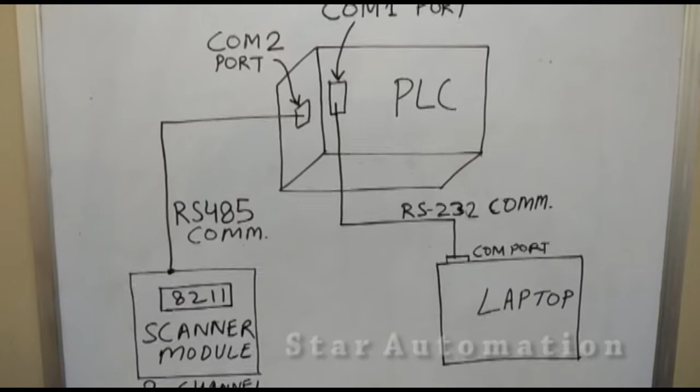So what we will be doing today is communicate the PLC with the scanner module, which has an RS485 port. The scanner module is nothing but a device that can accept analog inputs, various sensor inputs, and will display them.

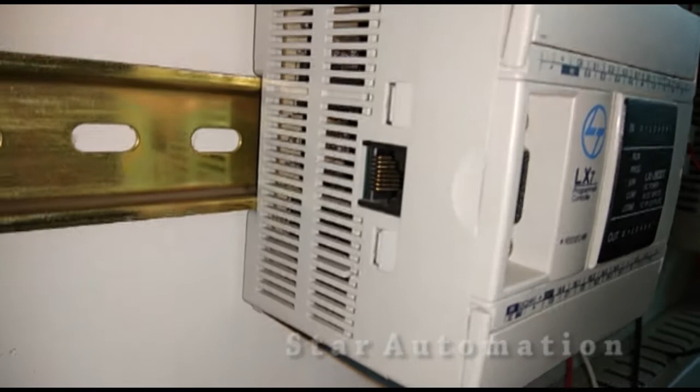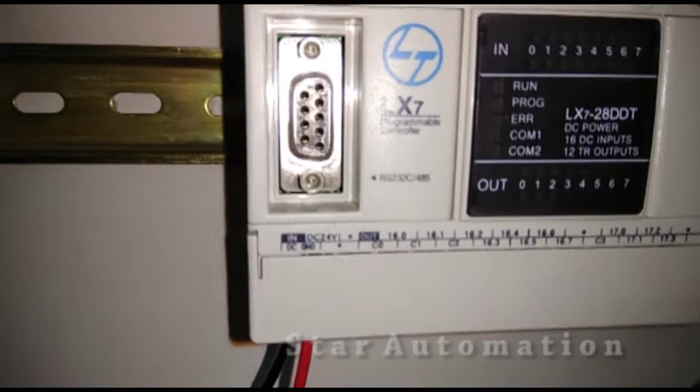So this is our PLC, and the front port which you are seeing is a COM1 port, and this left side port is a COM2 port, and this we will use as an RS485 port. RS485 communication we will be using here. And this is the power up terminal, and this PLC is a DC 24 volt power up, and we have already connected the DC power terminals.

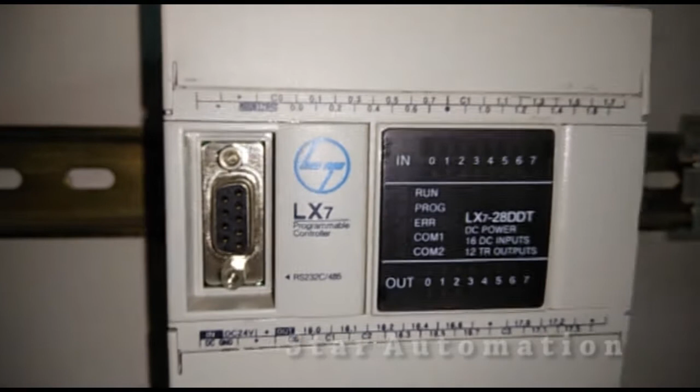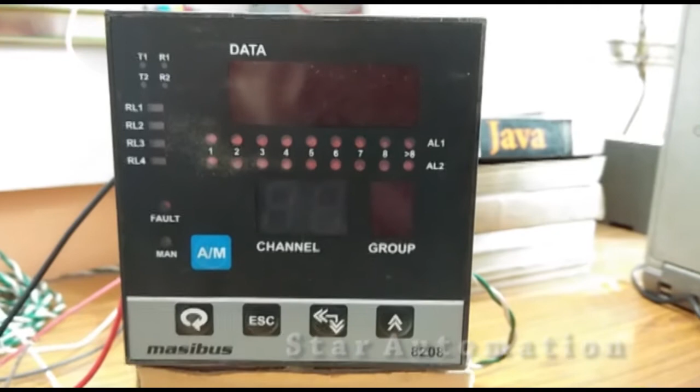And today our focus will be on learning RS485 communication, how we will use the PLC to communicate with the scanner module. This is the 8-channel scanner module, and basically it has 8 inputs, universal inputs. It can accept all types of inputs.

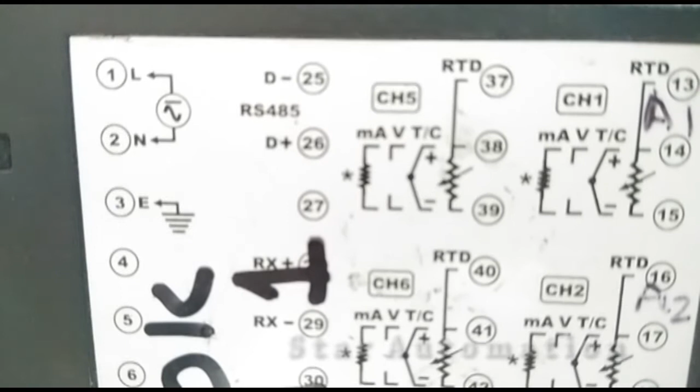See here, this is the connection diagram of this scanner module. 1 and 2 are the line and neutral power up terminals. RS485 terminals are D minus and D plus, that is 25 and 26, and the other one, channel 5, we can see here. These are the analog signals. We can give RTD signals, thermocouple, voltage, and milliampere signals. We have 8 such analog inputs which this scanner module can accept.

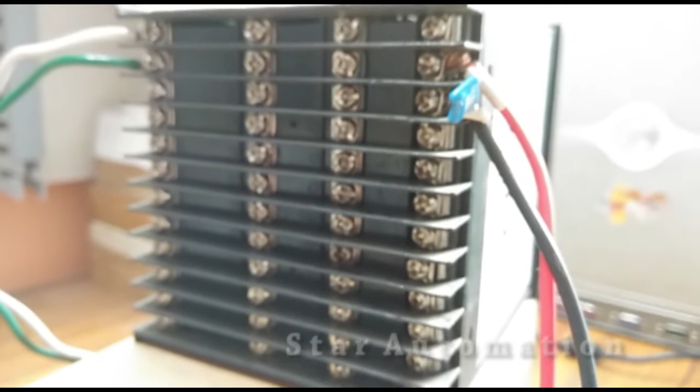At the back side of this scanner module, we have all the terminals as per the diagram, and right now we have connected the power terminals. Line and neutral terminals are already connected, and at the right side we have the analog input terminal. We are using a 4 to 20 milliampere signal, and we have also connected a 100 ohm resistance parallel to this 4 to 20 milliampere signal.

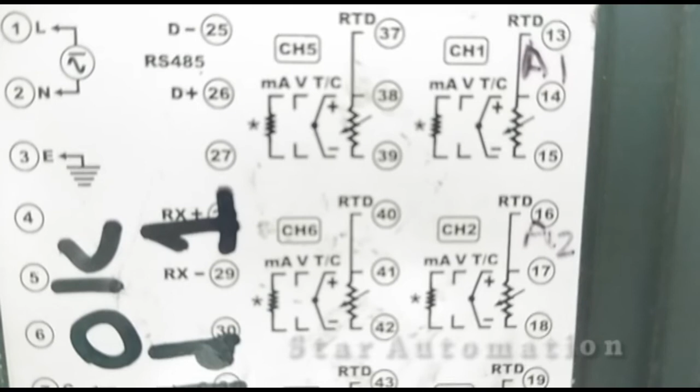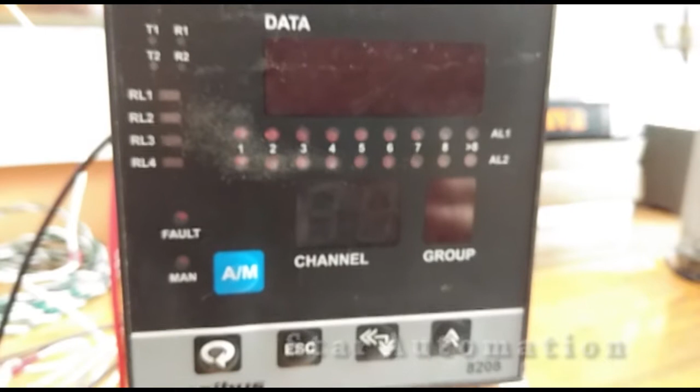As per the indication here, these are the D plus and D minus terminals, RS485 terminals. See here, D minus and D plus are terminals 25 and 26, RS485. We will connect our communication cable at this terminal, and we have used channel 1 only. We have only connected channel 1 at terminals 14 and 15. We are using a milliampere signal, and we have connected a 100 ohm resistance across it as per its recommendation. So this is our scanner module, and we will be using it to communicate.

The third thing we have is a laptop which has a COM port, so that we can program our PLC using this port. If you don't have a COM port in your laptop, then you can use a USB to serial port converter. So we have our COM port in our laptop, and we will be using this port to communicate and download the ladder logic program to the PLC.

Next we have this RS485 communication cable. This is the RJ connector, and as you can see we have used only 2 wires, which are connected at one side, at the first and second terminals of this RJ connector. This is basically the wiring diagram recommended as per the PLC port terminal.

So we have used only 2 wires, and at the first and second terminals we have punched them at this RJ port, and at the other side of this cable we have left open free wires. We have left open 2 wires. These two wires will be connected to the D plus and D minus terminals of the scanner for data communication. So we have left it this way.

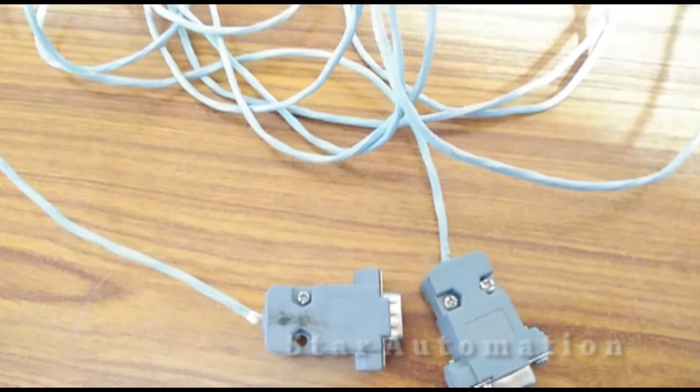Next, this is our PLC programming cable, and on both sides we have serial, but on one side we have a male connector and on the other side a female connector. One side we will connect to the laptop COM port, and the other side we will use at the PLC COM port.

So the female side will be connected here at the laptop side, and as you can see here, we have connected this cable port at the laptop side, and the other side we will connect at the PLC COM1 port for programming purposes. So we are getting our systems ready so that we can start working.

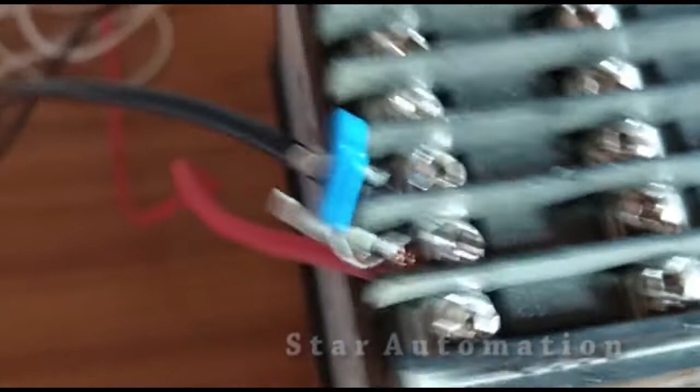This is our RS485 communication cable, and this is the RJ port which we are fixing at the left side port of the PLC. This is basically the COM2 port of the PLC, which we will configure as an RS485 port. And the other side of this RS485 communication cable we will connect at the scanner module's D plus and D minus terminals, which are RS485 terminals.

So these are terminals 25 and 26, and we have connected here, as you can see. So these are basically the data terminals D plus and D minus of this scanner module.

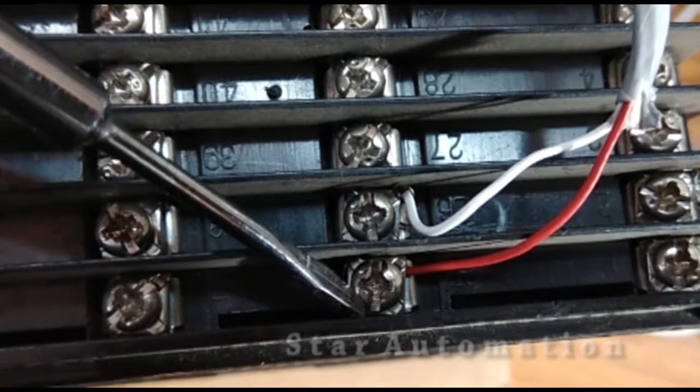And this one is basically the analog input signal, and this is a resistance, a 100 ohm resistance, which we have connected across the 4 to 20 milliampere signal, which we have connected at these terminals. This is channel 1 of the scanner module, and these 1 and 2 are the power supply terminals to power up the scanner module.

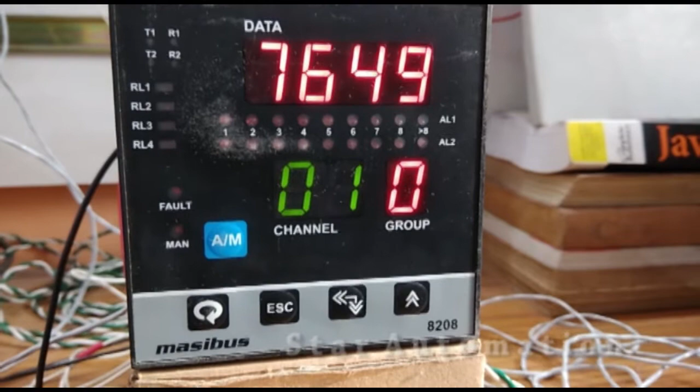So we have completed the connection of this scanner module, and now we have switched on the power, and you can see here channel 1, channel 2, channel 3, 4. It is going sequentially, and it is showing open circuit, and only at channel 1 it is showing some figure value because we have connected the analog signal at channel 1.

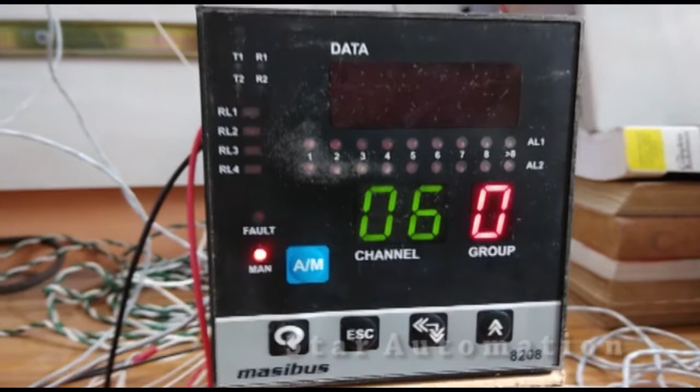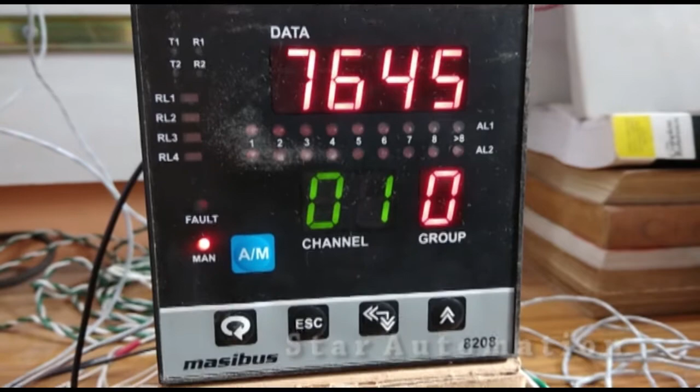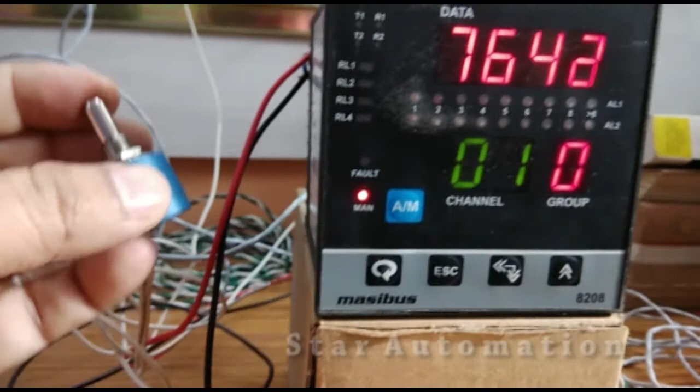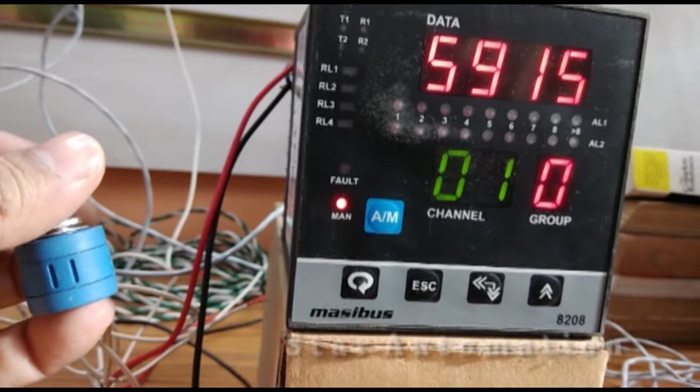And we can vary our signal using this potentiometer, and you can see the figure also varies. The numerical data value is varying by varying our potentiometer. So we have controlled our 4 to 20 milliampere signal in this way. Now our scanner module is getting one value at channel 1, and this value we will be reading in our PLC using RS485 Modbus RTU communication.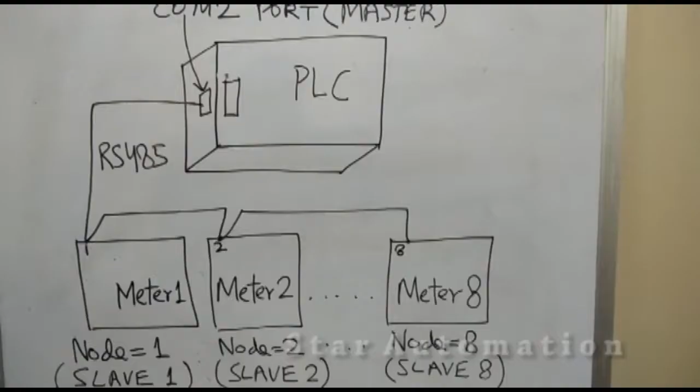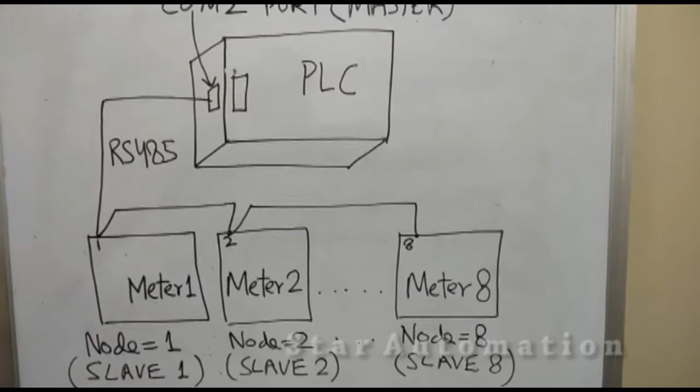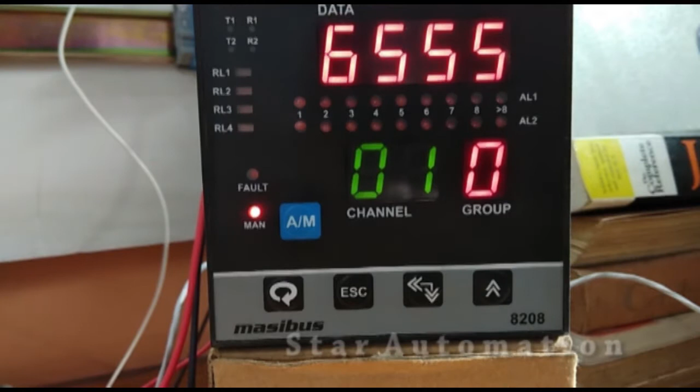So see here one more concept, that is the node concept. We have a master PLC, master RS485 port, and this will communicate with node 1, node 2, node 3. These are the various meters, and they can be called slaves. So this is our slave module. You can see here the scanner is basically a slave module, and now we will check the communication settings of the scanner module.

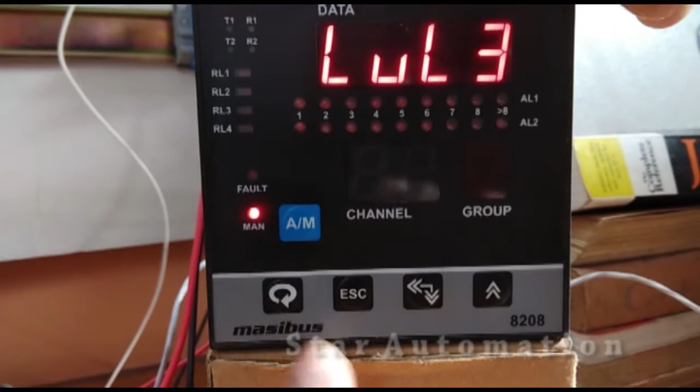So we have to go to level. This is level 2, level 3. We will explore the communication settings of the scanner, and this is a password. It is asking, default password is 0, and we will go through it. Now see, these are various parameters, and we have to explore only communication. I will check only communication parameters. This is scan type. These are the parameters.

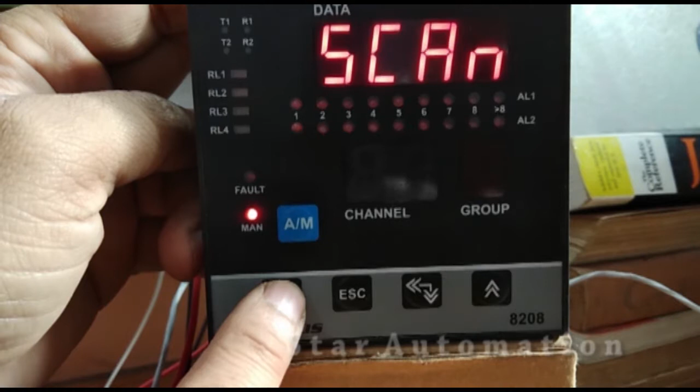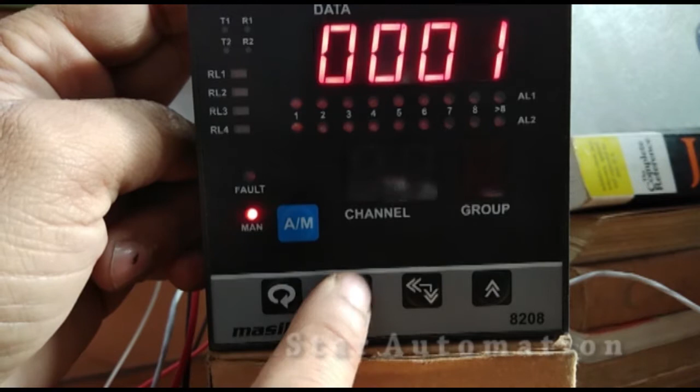See, this is a serial number. This is basically the node number of this module, and we have set it as 1. Basically this is slave module 1. Okay, now next, this is the baud rate, and it is configured as 9600 bits per second.

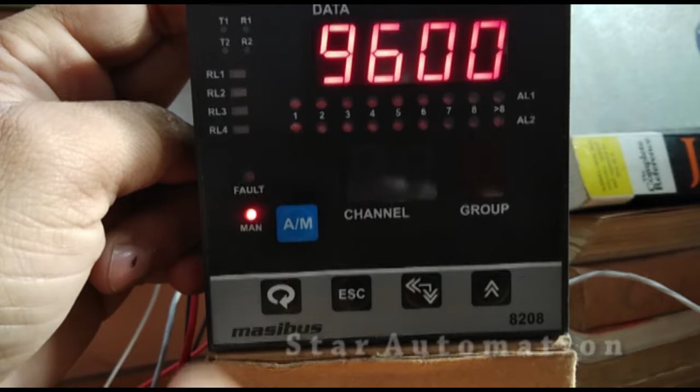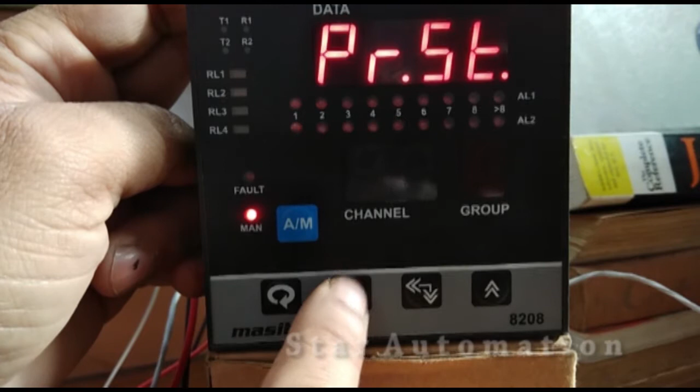Okay, and this is parity and stop bit. PR is parity, ST is stop bit. So parity is none and stop bit is 1. This is showing we have set it as parity none, stop bit 1. So now we know these are the three parameters which have to be matched with the PLC settings.

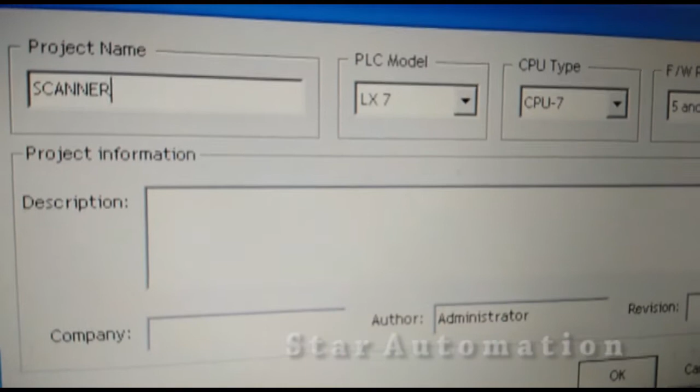Now we will come to our PLC and we will start the ladder logic. We have to build a small logic program to read the parameters of the scanner module. So we have opened LXsoft. This is the ladder logic programming software of this L&T PLC LX series, and we are creating a new project, and we will name it scanner com. So let this project name be scanner com. We have the LX7 PLC, and we will click OK.

So we have created a fresh new project, and we will build a small ladder logic program here. We will create the first line, that is the first rung, and first of all we will take one bit, that is system bit F0.15. F0.15 is a system bit of the PLC, and basically this is a run bit. So we will go to the comment section and write it as run bit.

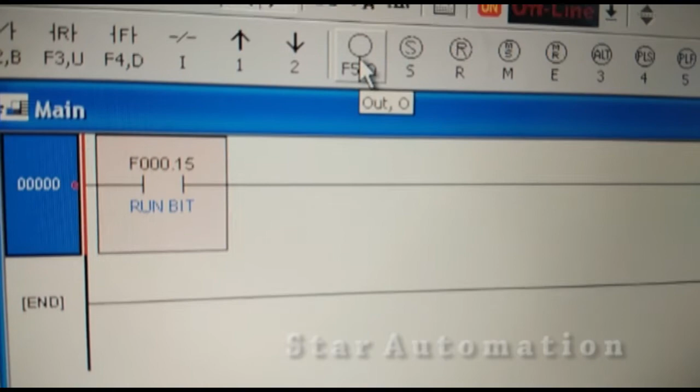Basically this bit will turn on when the PLC is in run mode. So we are using this bit for our logic, and when the PLC is in run mode we have to configure particular bits. Let us see here. Those bits have to be put high, so we will use it in this way. When the PLC is in run mode, these bits will be set to the on condition, 1.

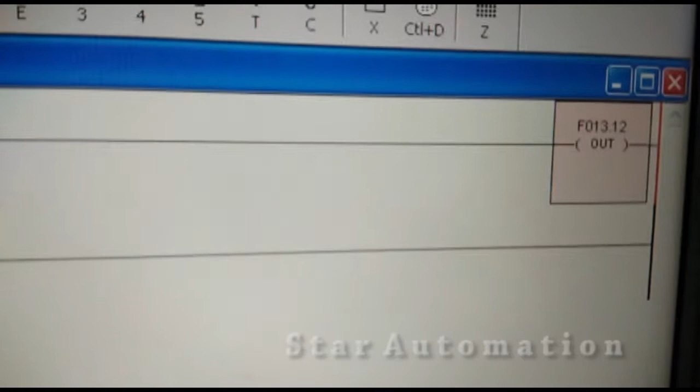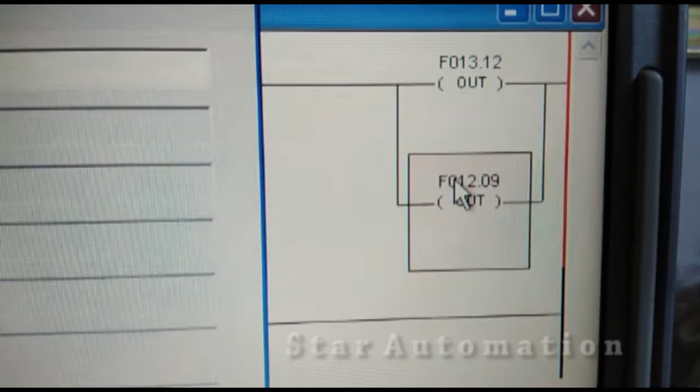So F13.12 and F12.9 are also system bits that have to be put in on condition if we want to use RS485 communication on the PLC COM2 port. Basically F12.9 is the enable Modbus RTU communication bit. If this is set high, then it will enable the communication at the COM2 port of the PLC. So we have set the required bits that have to be put in on condition.

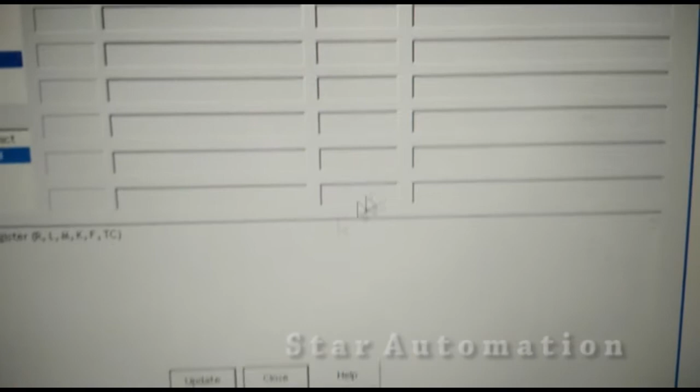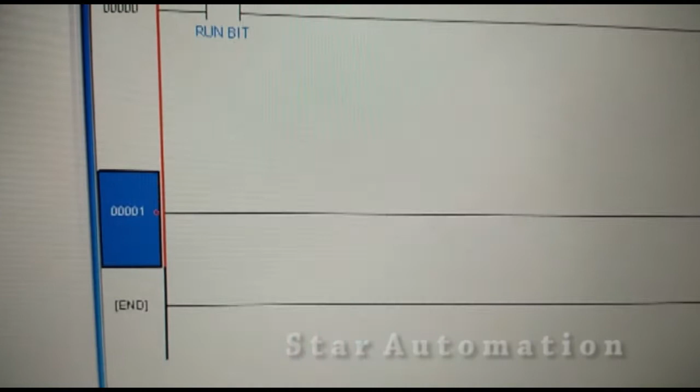Next, in our next line, we will set the baud rate of PLC COM2 port. As our scanner module has a baud rate setting of 9600, we will set the PLC also as 9600.

For that, we are using F1.0. This is also a system bit, and this is a first scan bit. Basically this will get on during the first scan time of a PLC. When the PLC is switched to run mode, it is on during the first scan time only. At this instant the F1.0 first scan bit will get on for that particular moment, and at that particular moment we will set

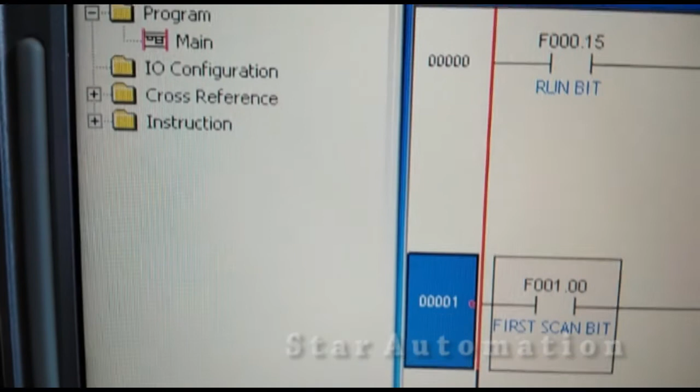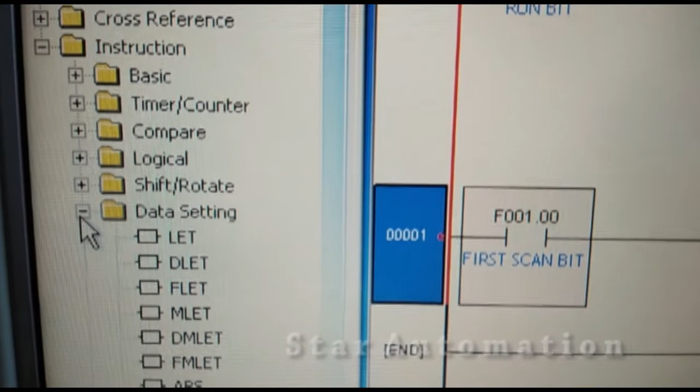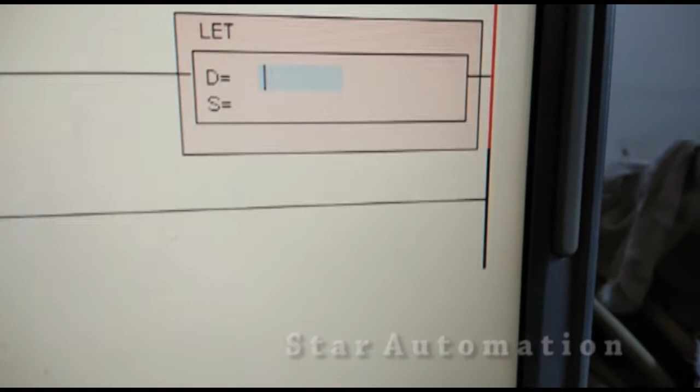the speed of the COM2 port to 9600, and for that we will use the LET instruction to move data. We will move the settings to this COM2 speed register. So we have status register SR510. This is a system register which holds the communication speed value of COM2 port. So we are giving it a value.

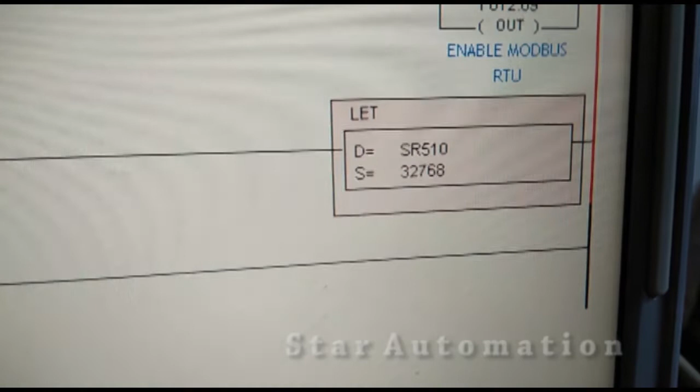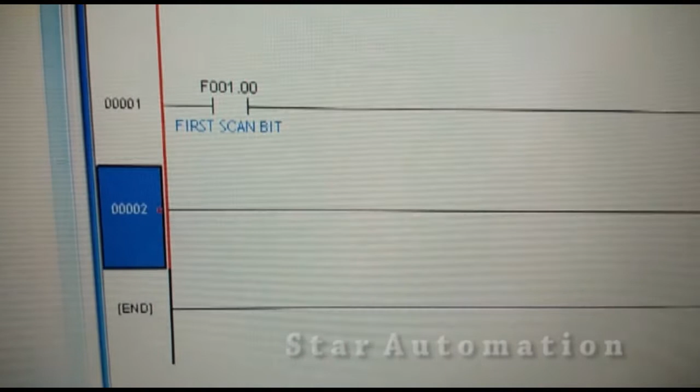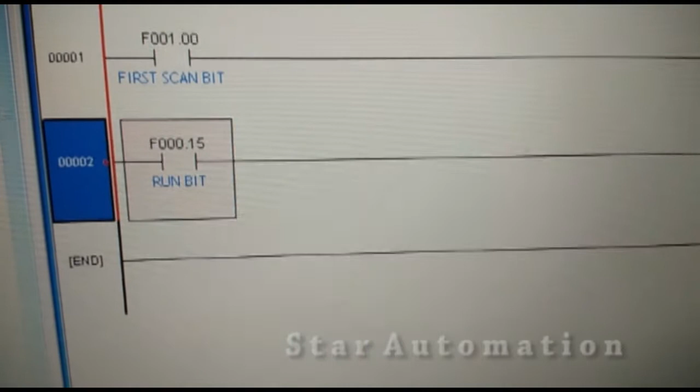D is a destination register, S is a source value. So we are putting 32768 here, and it will set the COM2 port to 9600 bps, bits per second. So we have set the speed of COM2 port, that was our RS485 communication port. And next, in our next line we are using the run bit as an input condition.

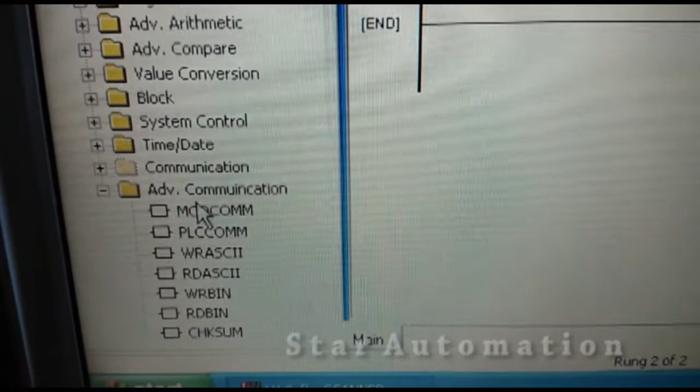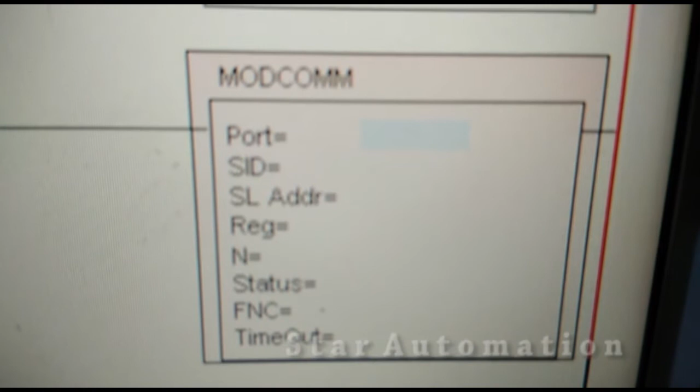And now we will use a Modbus communication instruction, that is in advanced communication. It is not in communication, it is in advanced communication. It is MODCOMM. MODCOMM is a Modbus communication instruction, and we will use this to read the scanner module data. In this instruction we have port, which is the PLC port we will be using, and COM2 port is there, so we will put value 2 here, because 2 indicates the COM2 port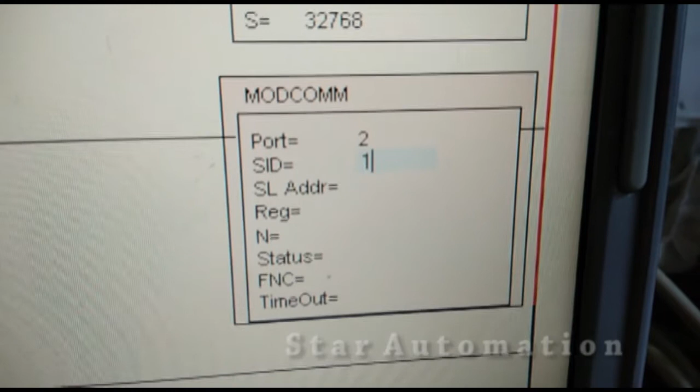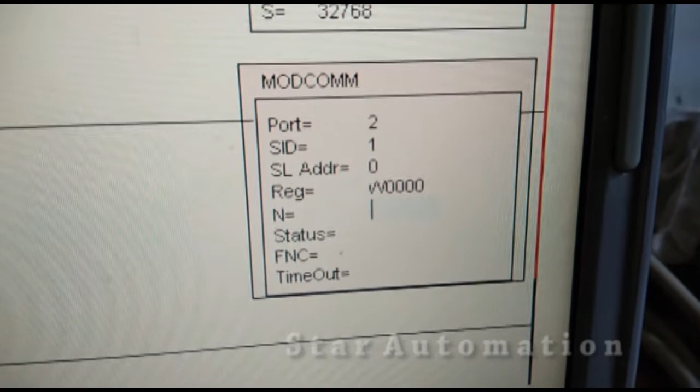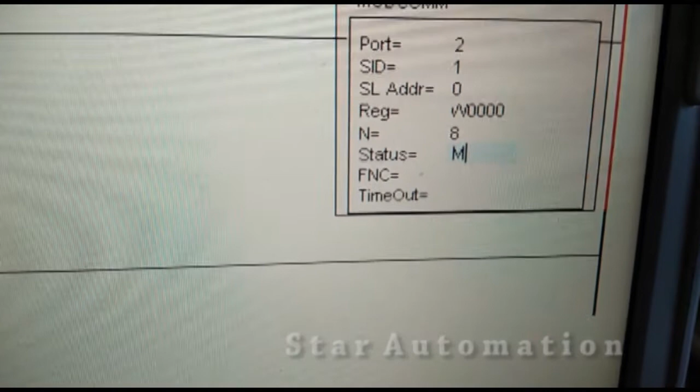of the PLC. And SID is the slave ID, basically the node number, and our scanner module is node 1, so we have put 1. Slave address is the starting address, we have 0. And for register we are using word register W0, and we will read 8 registers as we have 8 signals. And status is a memory register where the PLC stores the MODCOMM instruction status. So let it be M5.

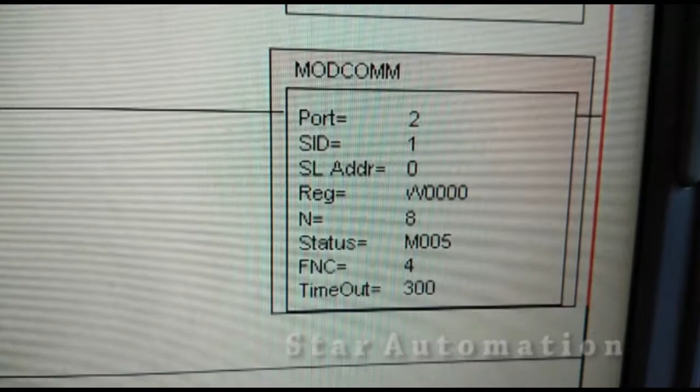And FNC is the function code of Modbus communication, and we have used F04, that is input register, to read the input registers, and timeout is 300 milliseconds. So we are using this MODCOMM instruction to read input registers, and the value will be stored at W0 registers. So we have filled up all the required details in the MODCOMM instruction.

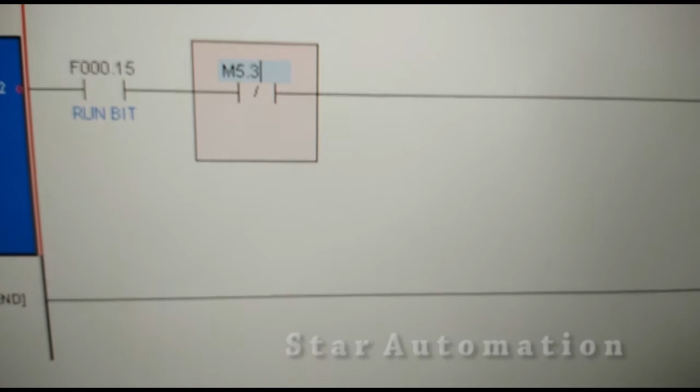And one more thing, we are using one NC contact of the status register bit M5.3. This is the done bit of this instruction. Initially the condition is true, and once the MODCOMM instruction reads the value completely, it is done. So the NC bit resets this instruction itself.

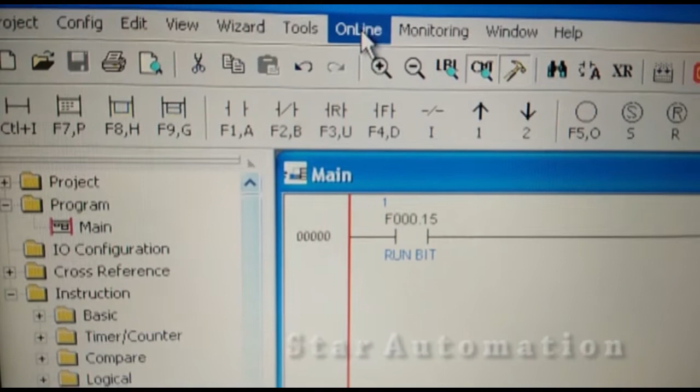In this way we have completed our ladder logic for the MODCOMM instruction, and we have compiled it with no errors. Now it's time to save and download this program to the PLC. We are saving it at the desktop, and next we will download it to the PLC. We will go to the Online option and then LX-Soft to PLC. We will click this option to download it to the PLC,

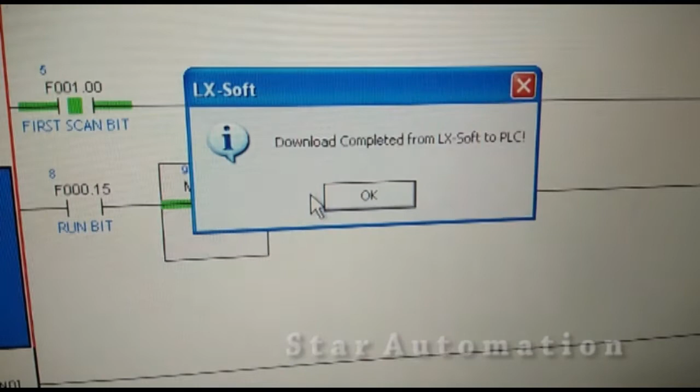and the default CPU ID is 255, that is OK. So we will click OK, and it is asking, do you want to continue? Yes. Download completed. OK. Now we will check one thing: this is online but the PLC is in pause mode. We have to switch it to run mode, so we will click this option, select run, and then OK. Now the PLC is in run mode and online.

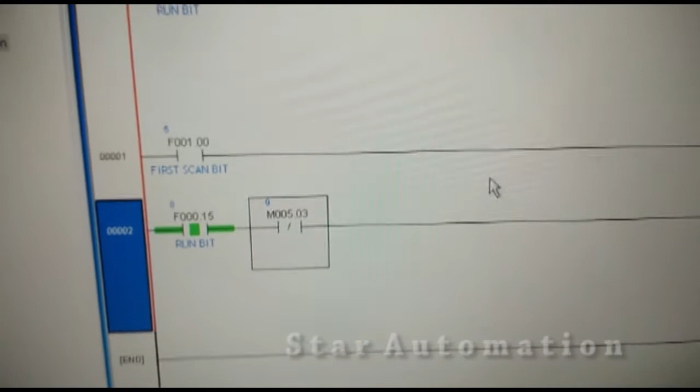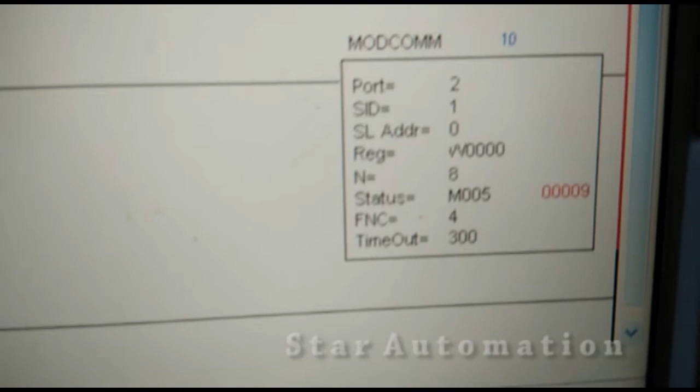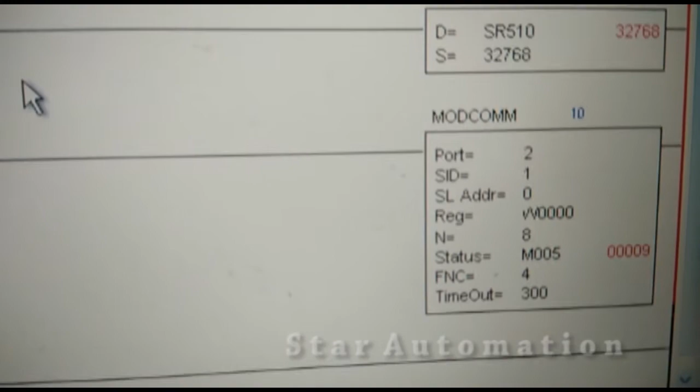So our logic is online with the PLC in run mode, and we can see here the MODCOMM instruction showing that it is in run mode. Now, our word W0 is the word register where the value will be stored. So let us check it, and for that we will go to monitoring, register monitoring. We will click here, and here we have register monitoring, and these are the various registers.

We have to go to the W register. We'll click the W tab, and here you can see W0 is showing a value of 6554, and other registers are showing 32767, that is the full value. At channel 1, the starting channel, we have connected a 4 to 20 analog signal. See here, this is the scanner module. At channel 1 it is showing 6554, and in fact we are getting 6554 here at the PLC too.

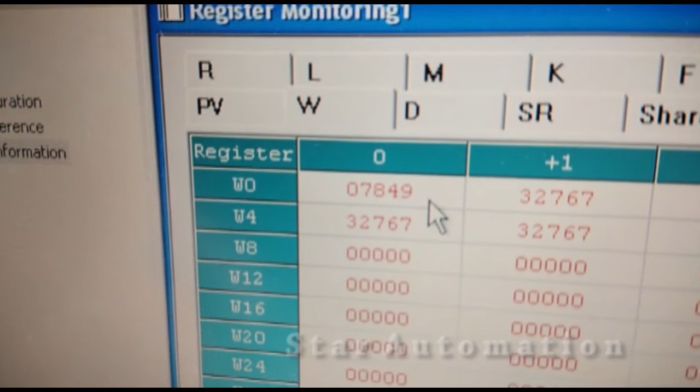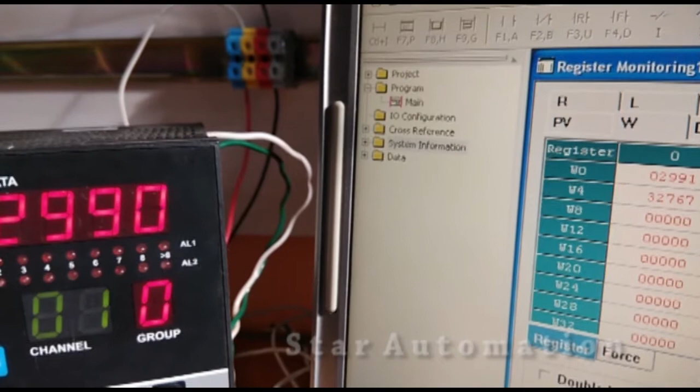So we are reading this value through RS485 Modbus RTU communication, and now we will vary this value and see the instantaneous change at the PLC side also. It is very fast, instantaneous. We are varying the value at the scanner, and instantly it is updated at the PLC side. So in this way we can communicate with n number of meters, up to 31.

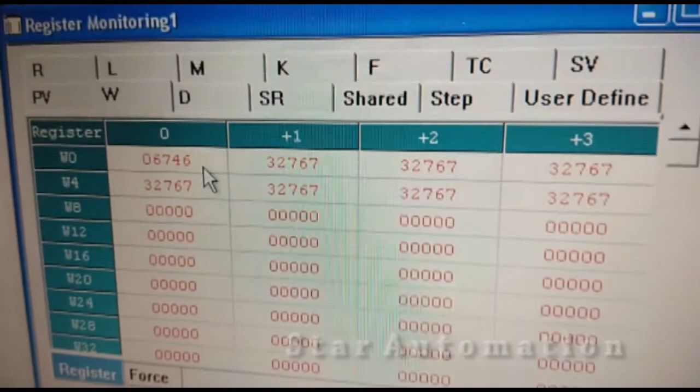Hope you have learned how to use Modbus RTU communication with a PLC. In other PLCs the concept will be the same; things may differ a bit, but the concepts will not be different.